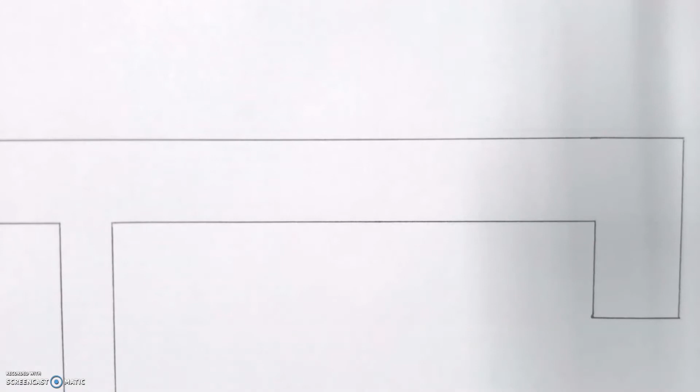For this video we're going to look at how to correctly hatch a wall in a floor plan. And for our floor plan walls we normally hatch at a 45-degree angle, and when we're indicating normal brick then our hatching should look like this.

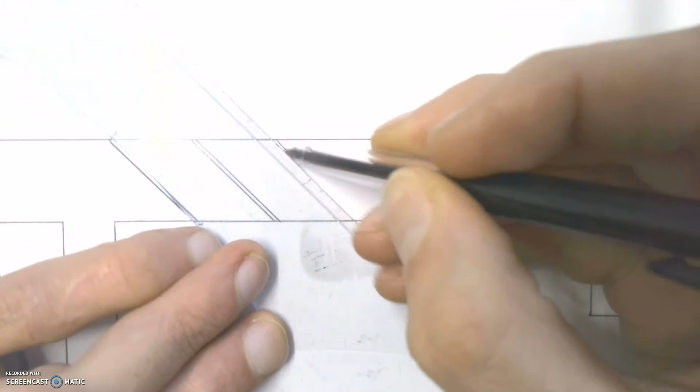We draw two lines 1 millimeter apart from each other, and then we leave a gap of about 7 millimeters, and we draw another two lines approximately 1 millimeter apart from each other, and we keep on going like that all along our wall. Okay, that is what we call common brick hatching.

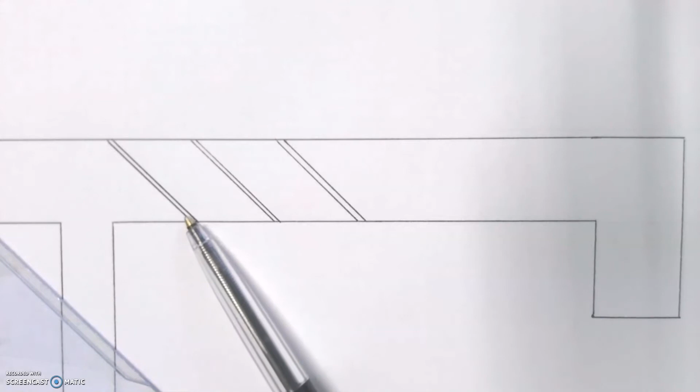Okay, so the gap over there must be approximately 7 millimeters, no bigger than that, and this gap here must be approximately 1 millimeter, again, no bigger than that. If that space becomes too big, or if this space becomes too big, then the hatching is no longer correct.

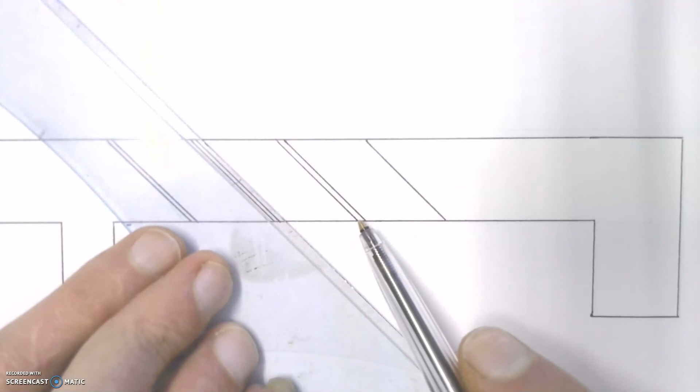If you're going to hatch a face brick wall, the hatching changes slightly. So remember, this is for common brick. For face brick, after our first set of lines which are paired like that, our 7 millimeter gap, we then do a single line, do another 7 millimeter gap, and then have another pair of lines 1 millimeter apart.

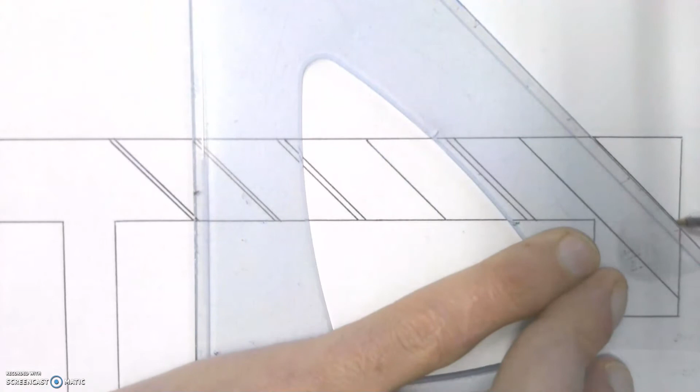Then we would do another 7 millimeter gap, and then have another single line, another gap, and then another double line. That is face brick hatching. Okay, so from there, if you're hatching face brick, that's what you would do. If you're hatching common brick, then that's what you would do.

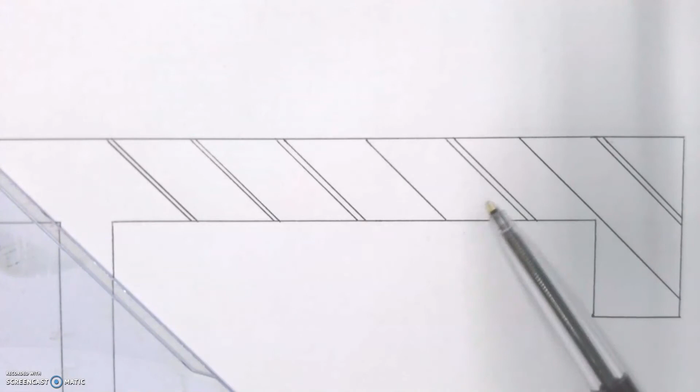And then I've included this little piece on the end here just to make sure that when you do your hatching, you do it correctly. Okay, so if you've got a little piece of wall like that that's left on the end, you need to make sure you don't leave a gap about that size there, because then it looks like you've forgotten your hatching. You need to make sure that that kind of gap is also closed up and clearly showing that you know that that's supposed to be hatched.

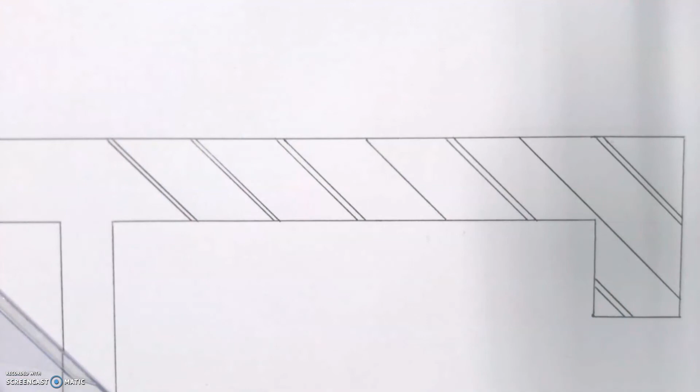And then the same thing for a wall that's coming off of another wall, especially if it's a thinner wall. You need to make sure that you clearly hatch both walls. So again, if we're going back to our common brick hatching, we'd do a double line like that, and then again with approximately 7 millimeter gap there, another double line.

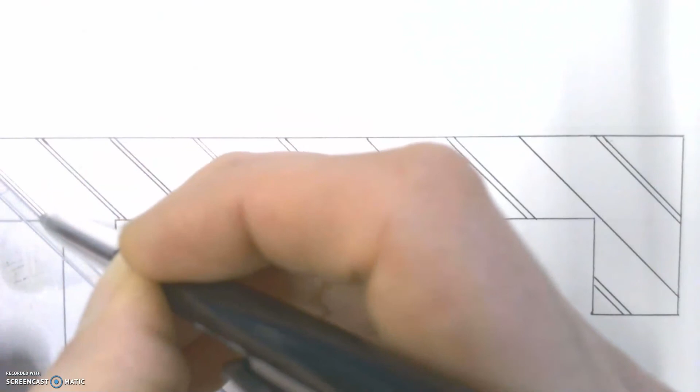And as we're now going into the smaller wall, you have to keep that same kind of distance between the lines going all the way through. It can't change just because you're hatching a thinner wall. You've got to stick to it going all the way through. So that is then correctly hatched on a civil floor plan.